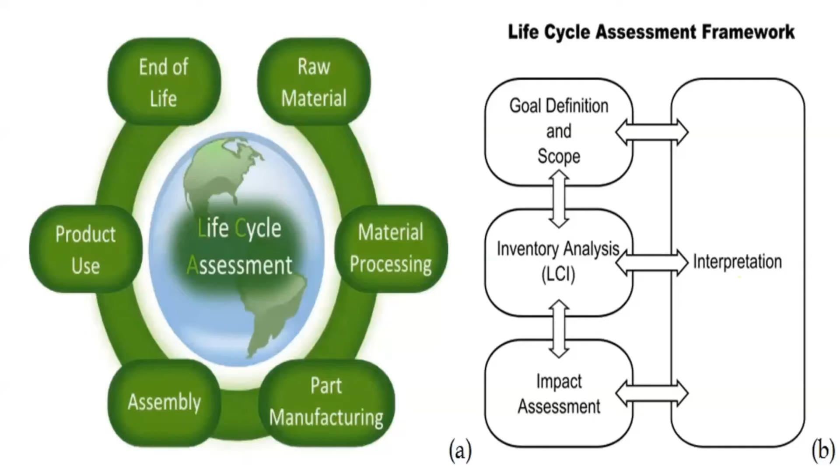So product stages mean the construction phase. You will do quantity takeoff from the databases, and that database is in the BIM. Use phase means over the use of the building, you will have to share some energy models with the certifiers and with LEED and with other institutes. Those are for green buildings. And the use phase model data will be from energy modeling software, like HAP or eQuest.

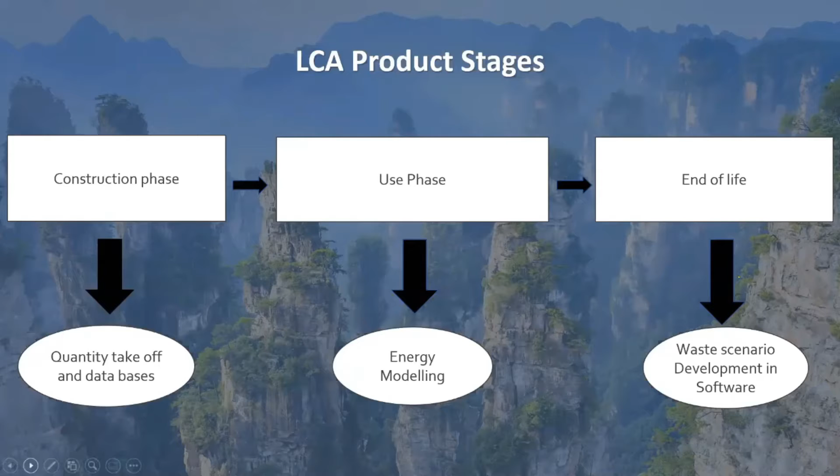And the end of life cycle waste scenario, there are some models in the software being developed for the impact assessment, and you can develop your own waste scenario, because everything is editable and can be edited and explained in separate files. I will explain that later in the practical demo.

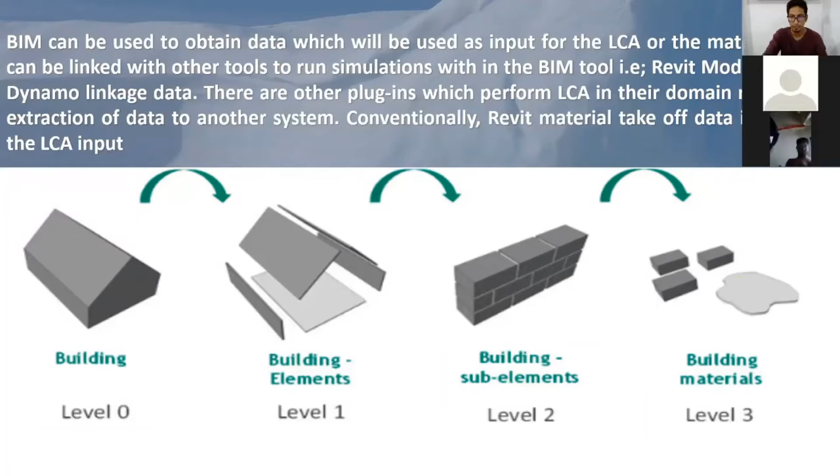So this is the BIM and everything, and the level of details and other stuff. This is the building level 0, the building elements, the building sub elements, and those items. And ultimately it will come down to the building material, and it's quite interesting.

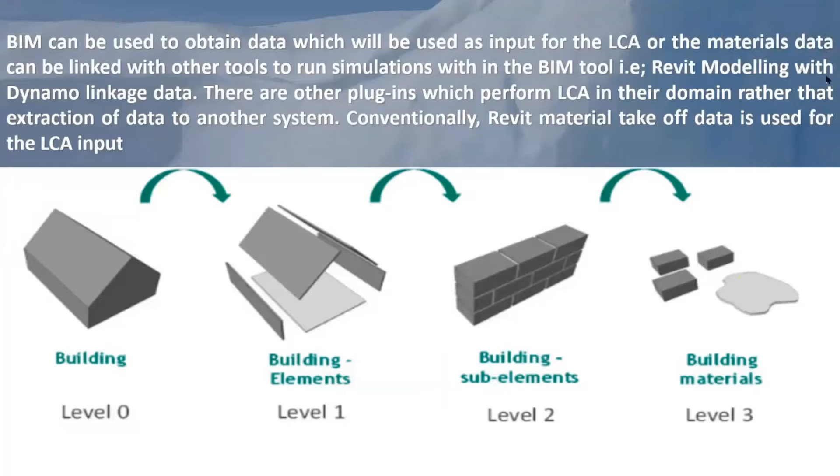Let's start from there. So there are 3 standard and acceptable software available in the market that can be used for life cycle analysis. SimaPro and GaBi are just like Google Sheets and Microsoft Office Word document or Google Docs are pretty much the same for handling, dealing and editing. Similarly, SimaPro and GaBi are the most widely used, and they are the most comprehensive.

SimaPro's clients include everything from General Motors to BMW and Volkswagen, and even in the military they use it for life cycle impacts, and even in the fashion industry, everything, even fashion products like lipstick, they are again material. So the material life cycle is again with SimaPro. Similarly, we all wear dresses, and even in the agricultural and textile industry it is being used.

So construction is no exception. Tally is tailor-made specific to construction, and it is a plugin in the BIM. You don't have to export data into some other software. You just go into another tab, like you go for energy analysis in the BIM.

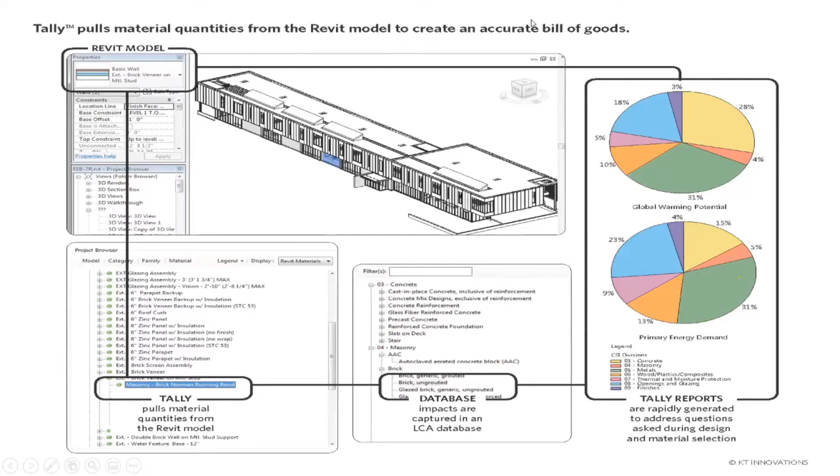Okay, so I will show you some videos of how this all works. Please bear with me and just have a look at this video.

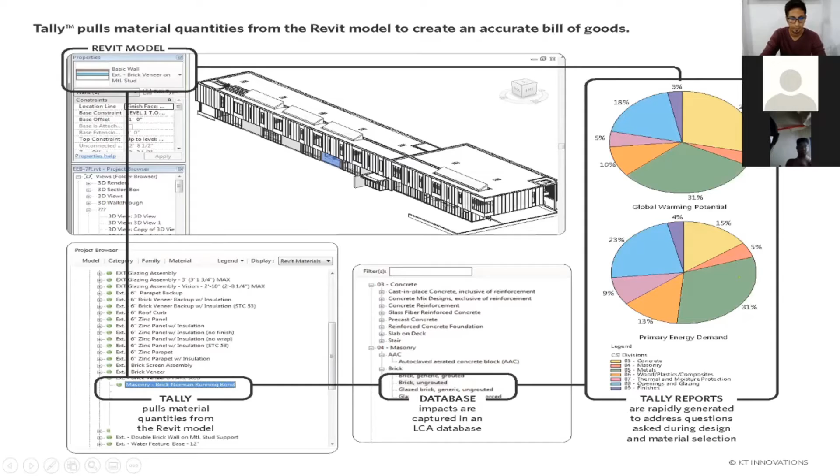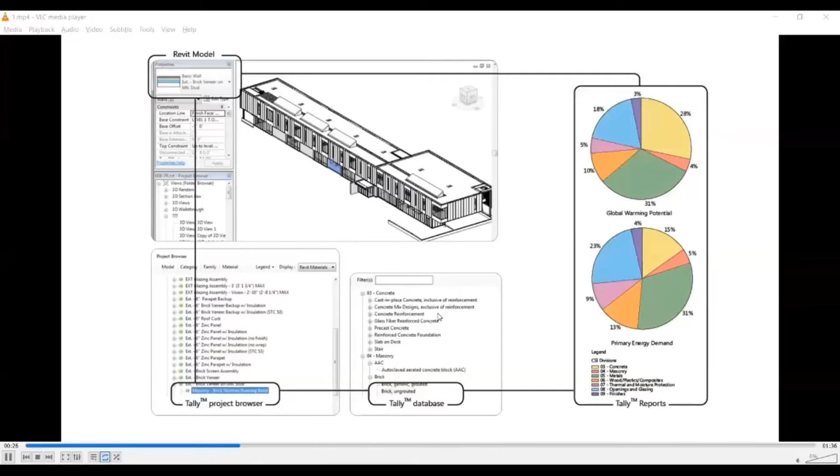Adnan, is everybody seeing the video? I'm not able to see the video actually. Can you watch it on my screen? No, we cannot see the video, Shoaib. Okay, you cannot see the video. Okay, I will share it. There is just a bit, give me the time. So what I'll do now, I'll just stop your sharing screen and you can connect again for sharing your video. Okay. I hope you can now watch the video. Is that true, now you can see the video? Yeah. Okay, so can everybody see it? Yes, we can see your video, your screen. We can't hear anything though.

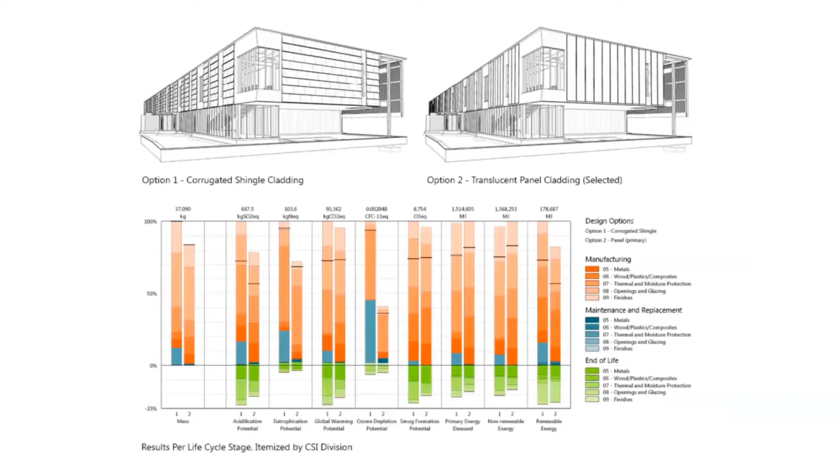To all the participants, there is no issue if you are unable to listen to the voice. These videos are available freely on the internet, you can watch them later to understand how it works, and I will give you a little bit of commentary of mine if there is anything to explain. So there are just 2-3 videos, just 4 to 5 minutes each, and we can go through them.

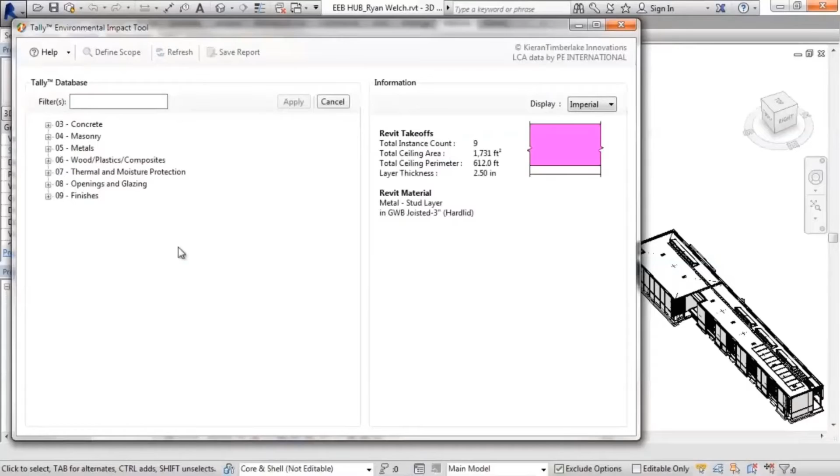So this is just showing how you can edit and go through and apply the materials and take off by spacing or by the length method, and I hope you know the different quantity takeoff methods. You can use the unit and definition and apply, and all the material properties will be in. You can just select the life cycle stage in the CSI division.

We use the categorization scheme there, and there are different methods of life cycle impact analysis. The ReCiPe midpoint method is the actual method that we widely use because it's the most comprehensive. Otherwise, if there is some special demand, you can click, and the software will know that you are going to run with that categorization scheme. So that's all about just pick and click and then done.

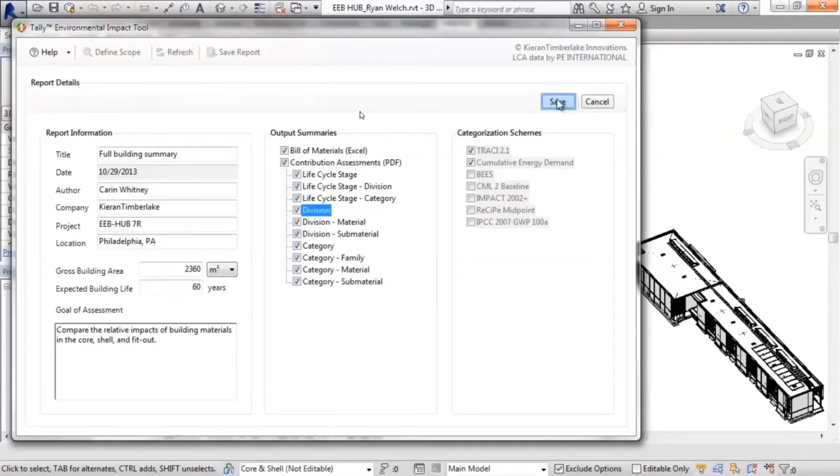This is the kind of result, the life cycle stage is there, material-wise there are legends, there are results, and the Revit categories. So now the second video.

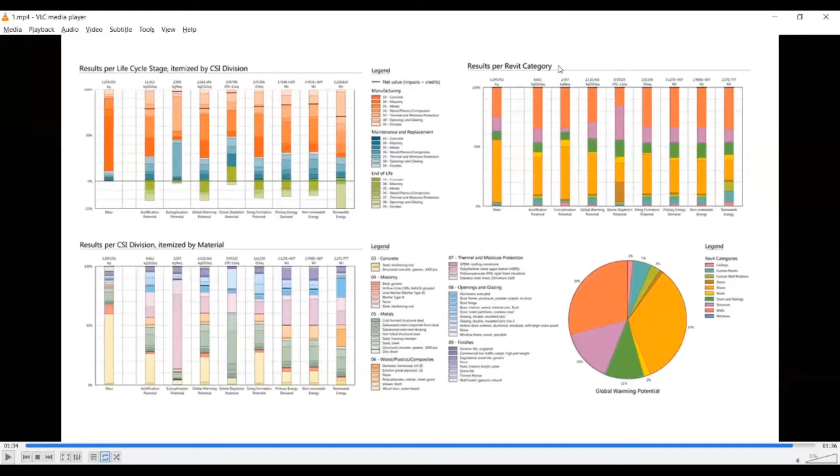I hope you can watch the second video. Yes, now it will start from the beginning. Let me just... okay.

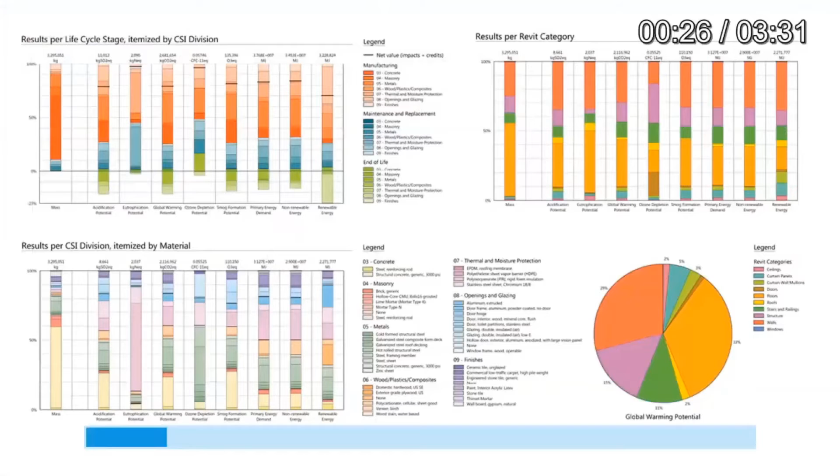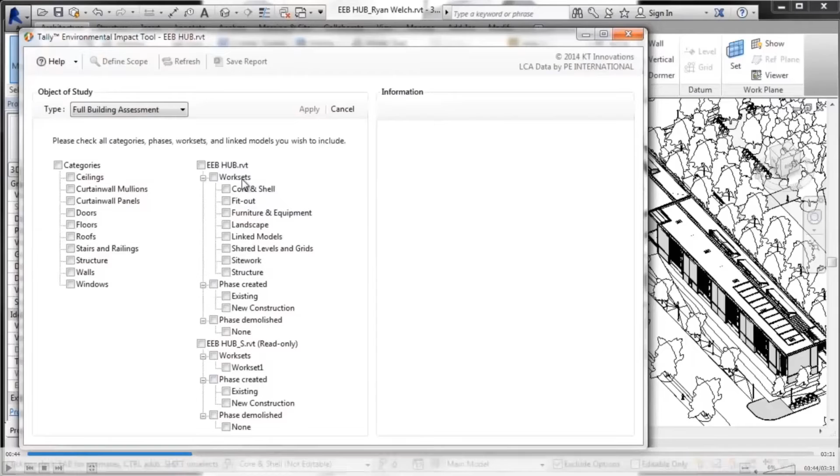The full building assessment has been selected, meaning we want to have a full build assessment, and we are selecting all the categories. Why do these categories have the option to select? Because sometimes during research or while justifying to the certification authority, you need to justify a particular part of the building, that the floor material or the roofing or the curtain walls or the panels are sustainable in their own individual capacity, or they are being responsibly sourced. So you just go to that particular option, select and generate the report and justify your case.

So in full impact assessment, you will select all the categories, and the relevant scheme will change accordingly. So the full scheme has been selected, and then the workflow - one more thing is that you can distinguish between new and existing construction, and you can define that in the BIM, so you know how much we achieved from the previous renovation scheme or structure, because sometimes there are no new structures, just renovation and extensions, and you explain and justify that.

Even in the LEED certification, they ask you to select whether it's a new construction project or a renovation project, because different thresholds apply for LEED and other standards.

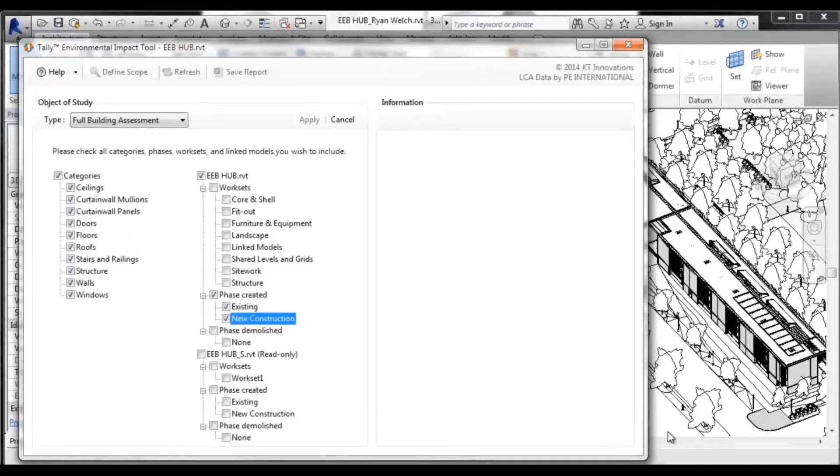That is selecting everything. You can see they are selecting the Revit files, worksets, workflows, everything. Phase demolished - they are considering the waste scenario as well at the bottom of the screen.

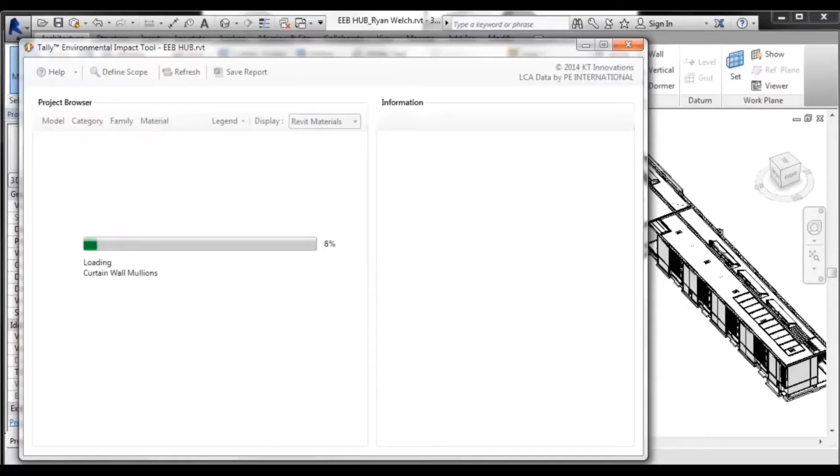Now Revit is loading all the families and all the material data. It depends on your computer speed, but in actual it doesn't take much time. It's a very light plugin, although it's a paid one, but it's a light one.

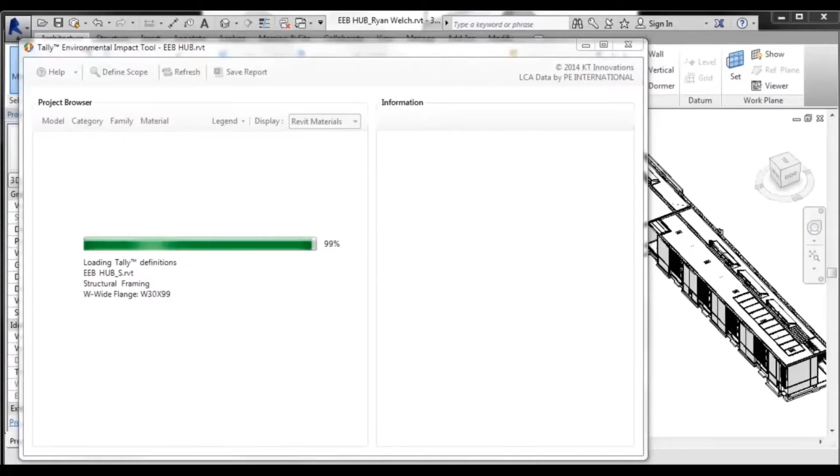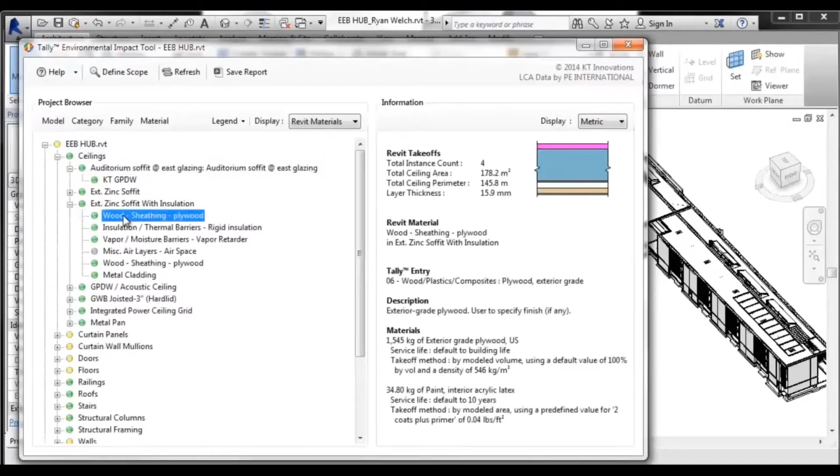So now there are different colors. Green means that all data is being pulled. Yellow means that something is not right and something is missing - that will tell you to pick and choose and edit everything. Gray has a different definition, that okay, I have some missing data. Ultimately, green means that all data is set and good.

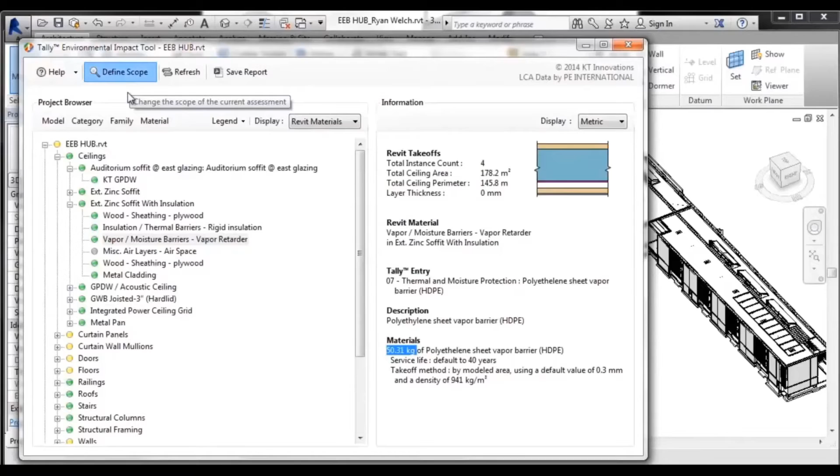You will define your whole analysis, and the whole definition of life cycle will go null and void. So scope is as important as anything, even more than conducting the life cycle analysis itself, because there are different scopes defined in the ISO 14040. You can read that - it's just a little 10 to 20 page document.

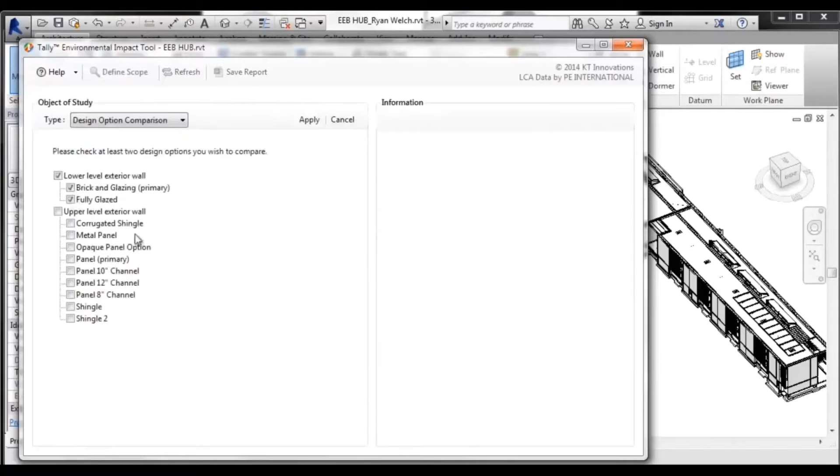Design option comparison, you can do that, because being a designer, you have to decide what is right and what is wrong. All the material is selected, all the categories, Revit file is selected. Now you want to apply that.

So everything is being loaded up again, loading. Okay, so now here is the legend.

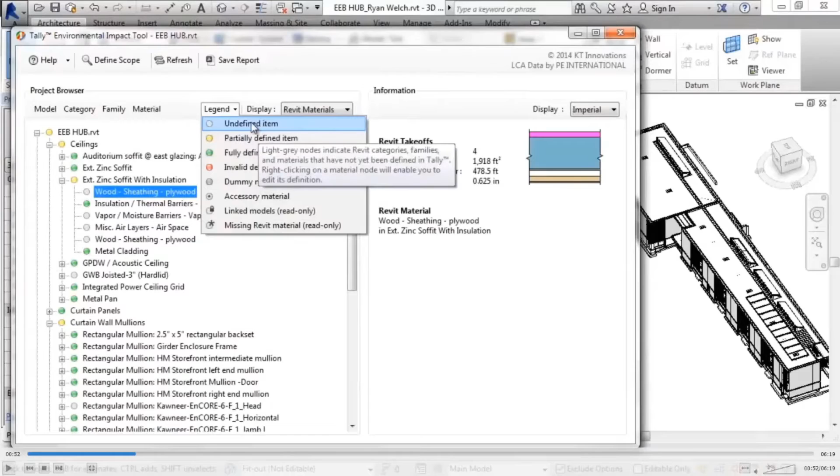That explains that gray means the undefined item, partially defined, and fully defined mean the data is completely being exported to tally as well. So invalid definition means that the system or the plugin doesn't know which element it is or which material it is. So you will go define and edit, and there is everything - you can change the U value, the R value, and material properties, quantities, data.

Sometimes you have regional boundaries as well, because the distances and geographical locations can highly sway the results of analysis.

Tally only has data from the USA. But I have seen a project in UAE that conducted a tally analysis and was accepted by LEED, because they provided all the justification of how they benchmarked the values, and that was all done in defining the scope. So your scope is your validity - the analysis is just the calculation.

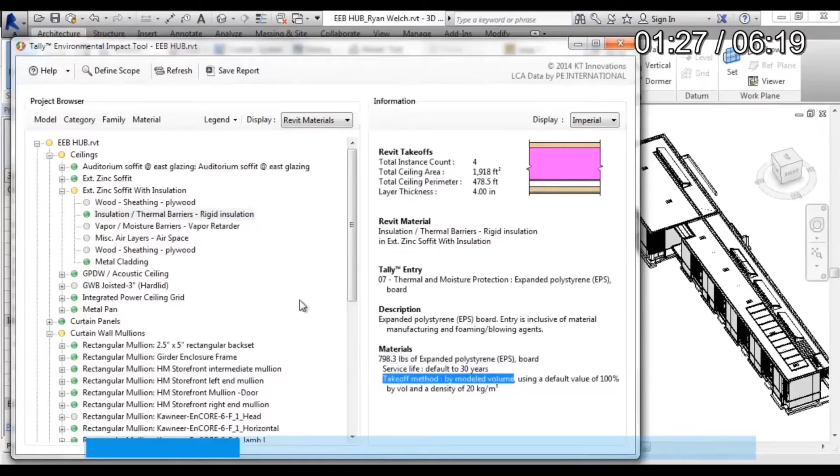I will just - you can change the thickness over here, because you are going to change the thickness and see the results. So edit definition, you can edit.

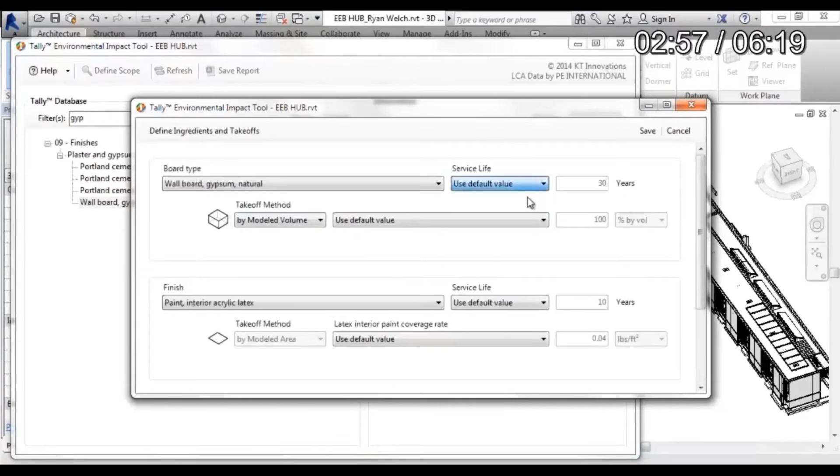There is a database of everything. Basic material, you can define a whole new material. Takeoff method, again you will select it, and everything will be done by the plugin. So it's just kind of a magic box - you go, you put, and you get the results.

Everything in the background, especially the calculation - the life cycle calculations are way too complex, way too complex. If you open and go to the SimaPro, you have to put everything manually. You will know in a minute that there is no joke about life cycle analysis.

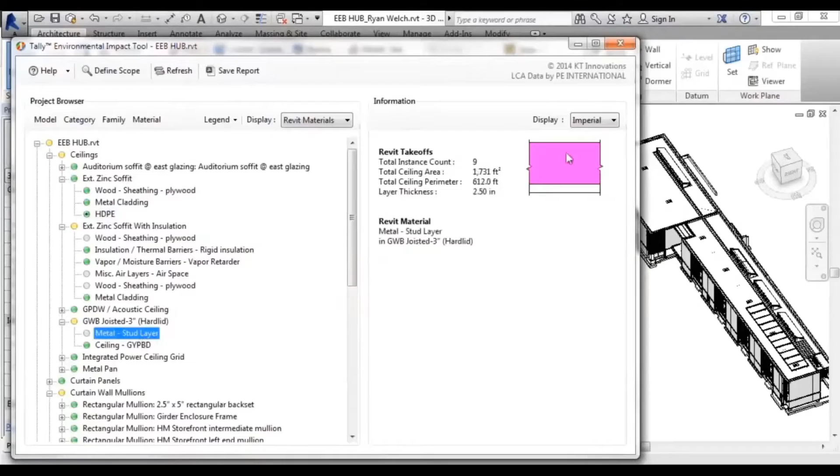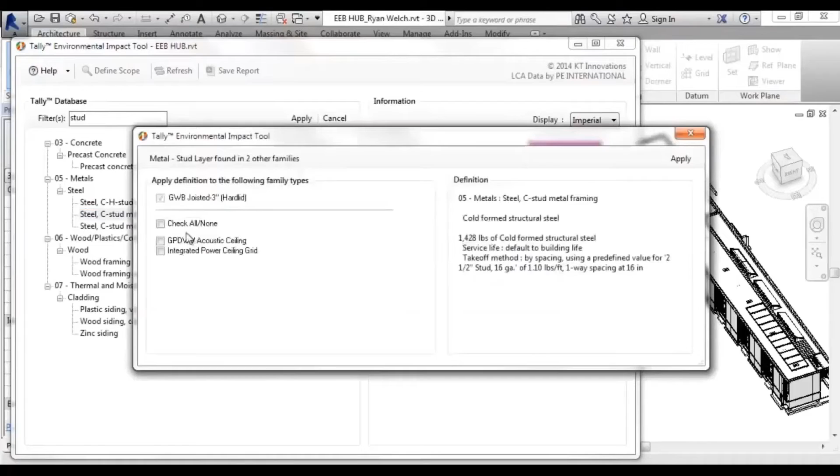To all the students who are going into this BIM business, if you really want to make a career in sustainability and everything, this can be your starting point. It covers everything in terms of BIM handling, in terms of defining, designing - it covers everything. It's a good start, you can earn from it, providing consultancy and everything.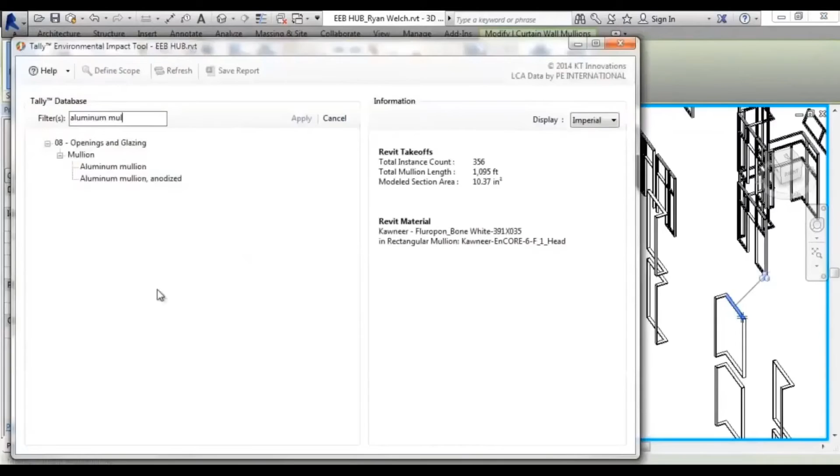So it's quite good, but you have to be familiar with the analysis, because no one will be asking questions about the analysis - everyone will be looking at the scope while going through your report and evaluation. So you must know the definition and everything.

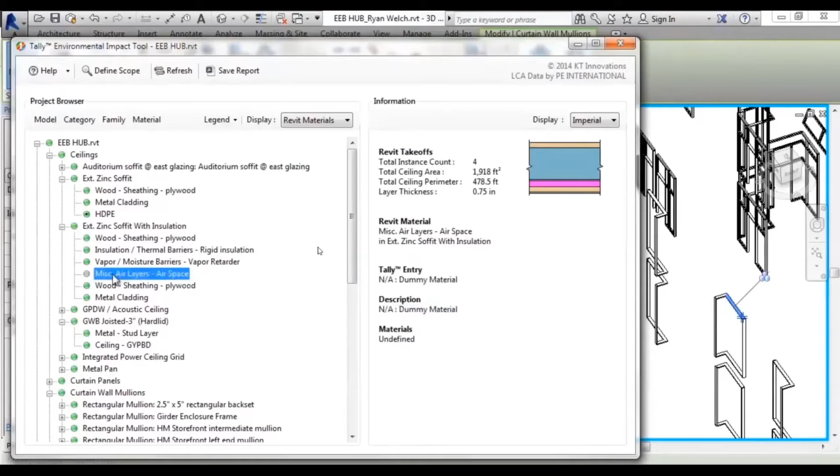Okay, I will start. I will stop here. Okay, I will start. There is a zone going on. So, okay, no worries, I will start.

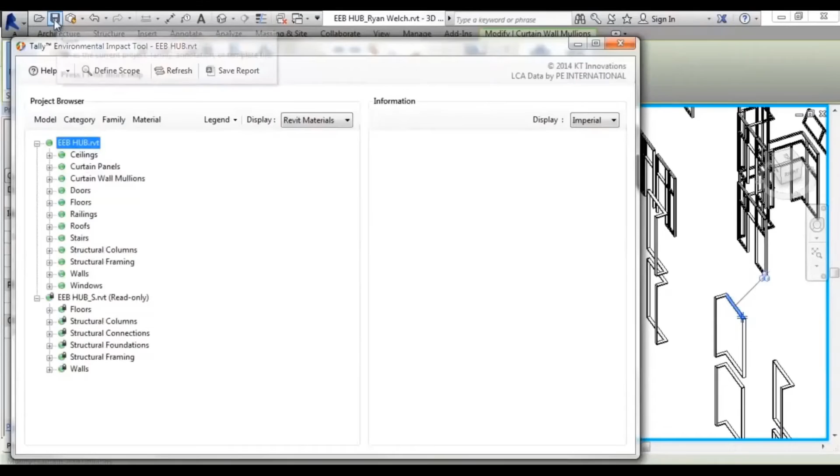Dummy materials are the materials that the plugin doesn't know, so it asks you to define them. The EEB HUB.rvt means the file system, that everything is taken from RVT files, even if you have RVT files of some different project and different model, you can just start from that.

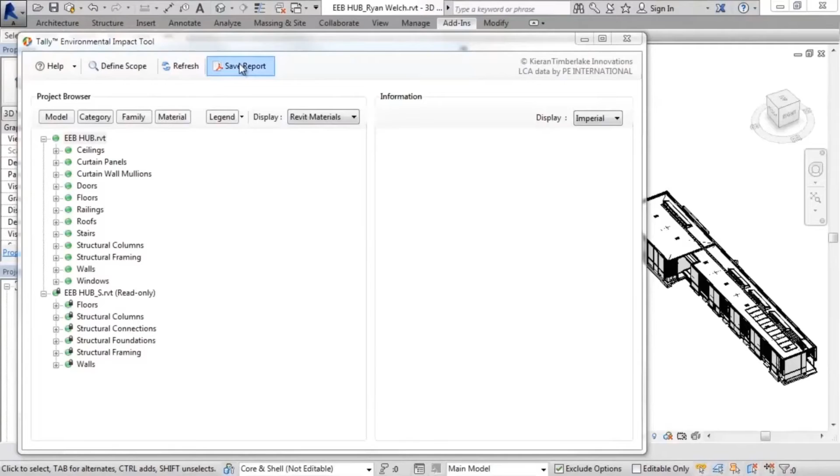Everything is defined, materials are defined, and you can see that everything is green now. Go to the plus sign and check if the relevant files are also green. When there's full green, you go ahead and click on save report, and that will ask you for the name, date, author, company, project, and building gross area, so the person evaluating your project gets to know the salient details.

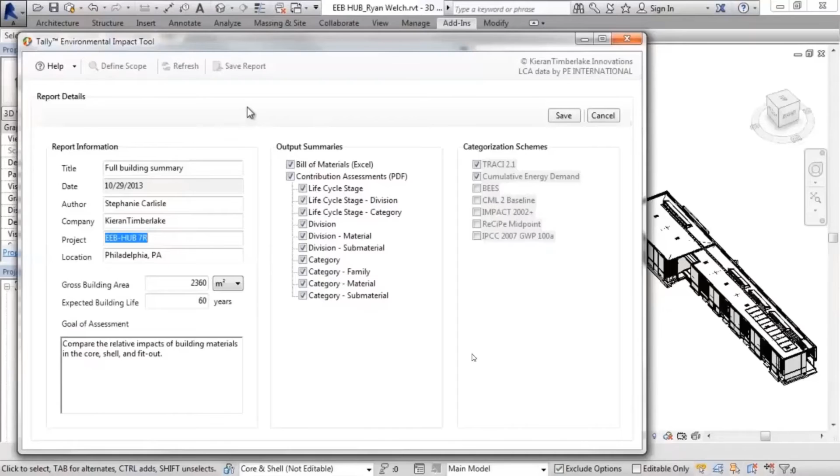Then you go to the goal of the assessment. What is the goal? Because sometimes there are concerns related to water, sometimes concerns related to land use. So you have to say what the goals are, so people know we need to look for this particular impact category, and that demands the improvement. You'll see that everything is imported, and you can just save.

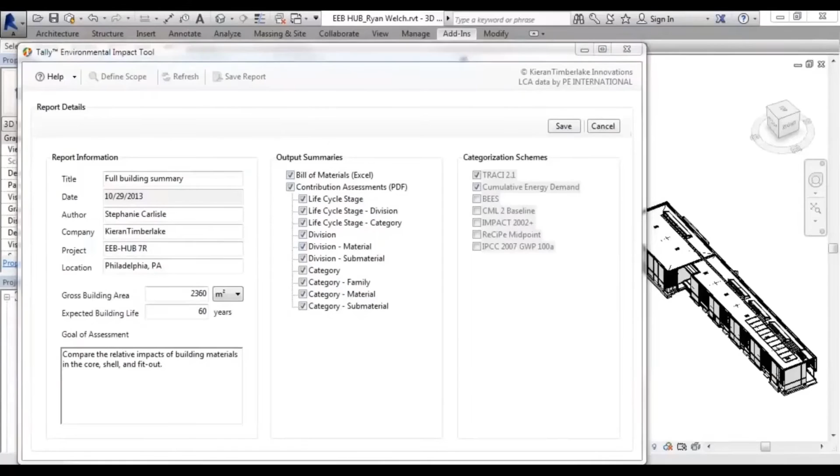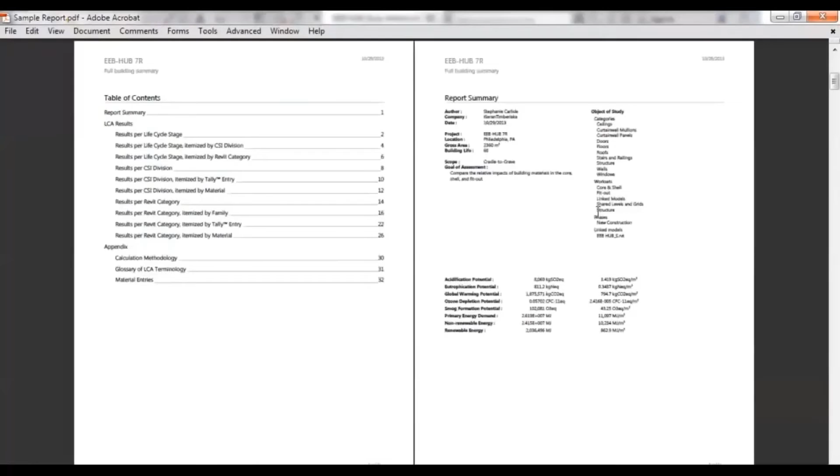The moment you hit this save button, your report will be generated in PDF format. It will take a bit to generate, but it will be a very visually pleasing and authentic report. You can have that in Adobe, and that will define the summary. It will be a proper report like any professional can develop, but here it's just a click away. You are not actually writing or doing anything.

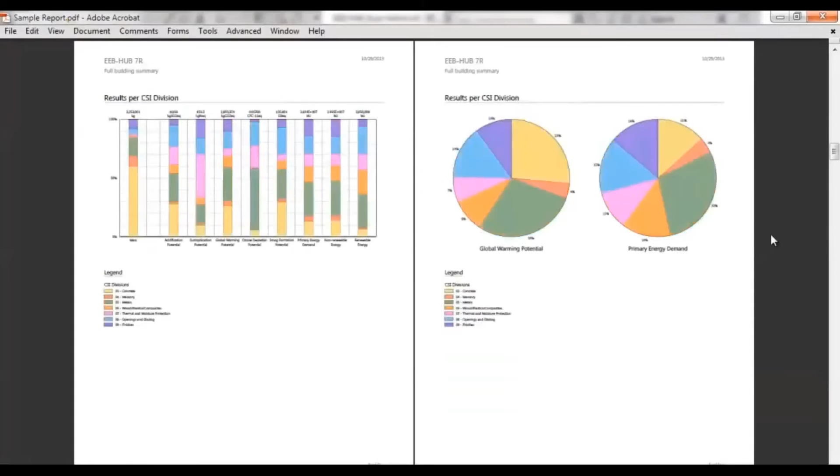You can see there are different parameters in terms of environmental impact assessment, like how much this is contributing to global warming, smog formation, and the bandwidth of this color scheme will define how much your concrete and this material is contributing more weight in that. Ultimately you go and see that material.

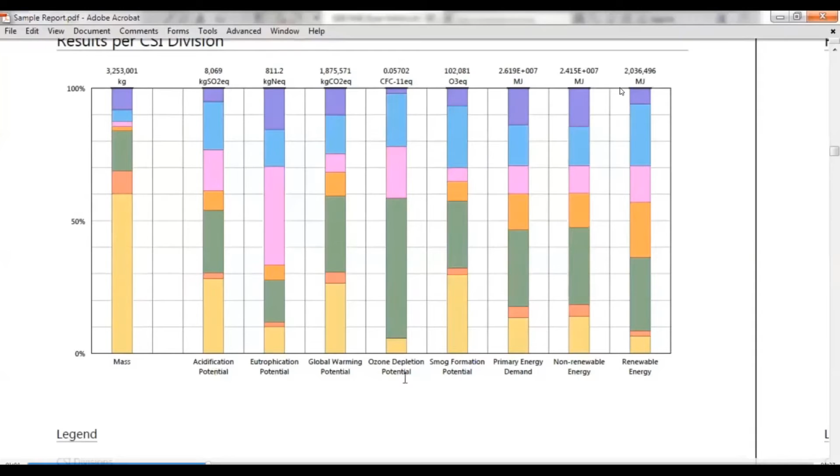So you have a very targeted approach here, you don't go through the whole process and check everything manually. The software tells you itself that you have this much issue in this area, and you can go over there and change the material or look at that, and that is causing the problem.

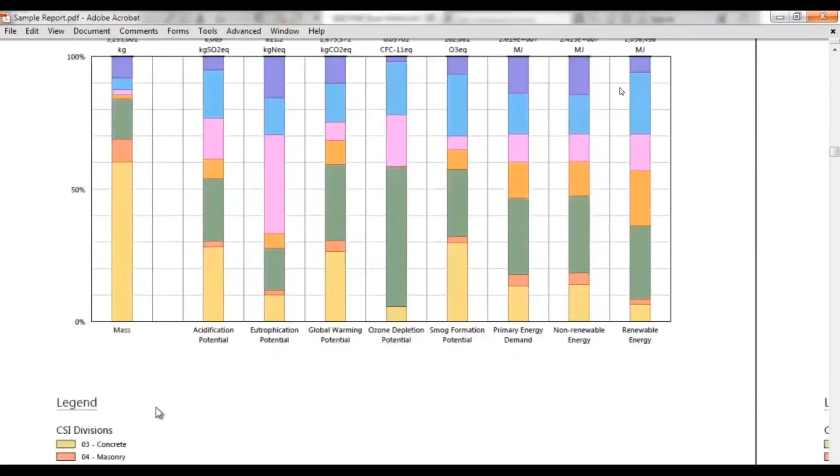Here the red color is for the masonry, green for the metals, woods, and thermal.

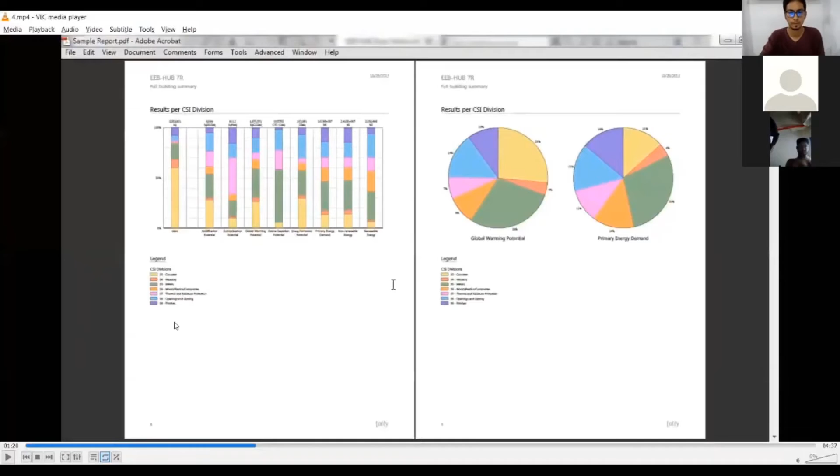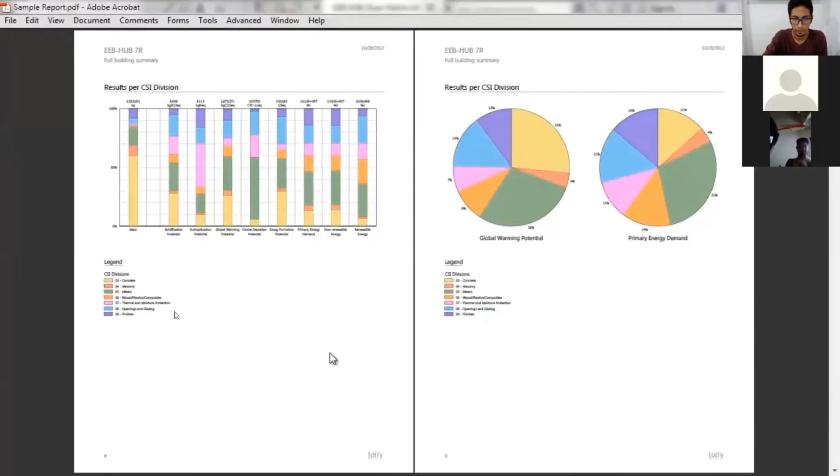I will share the links of the videos, you can watch them on your own, because here you won't be able to read something due to the text and fonts. He is just explaining.

Shoaib, can we also work in a cloud environment with this project?

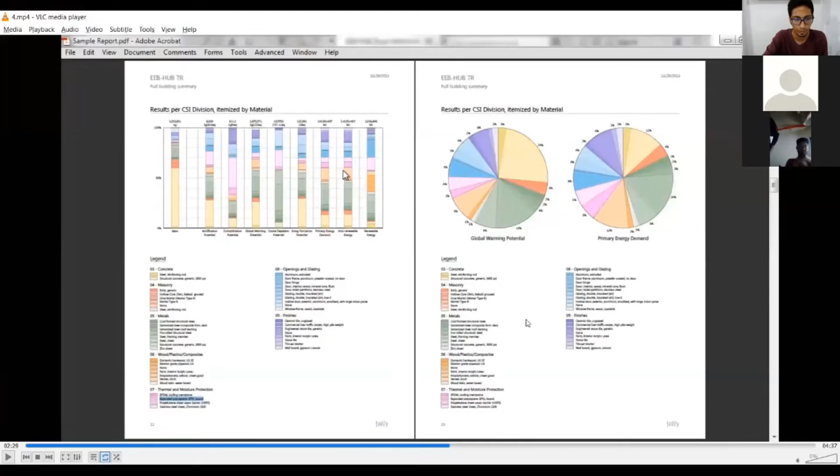Yes, you can work on a cloud as well, but you have to ask the institute or the developers of this application, because if they allow you, you can have your own. They have their own cloud service as well, as far as I know, or they will provide you the complete license, and you can work from anywhere, and even get data from other people. People can share their file, you can run that file in your own system, everything is good to go with that.

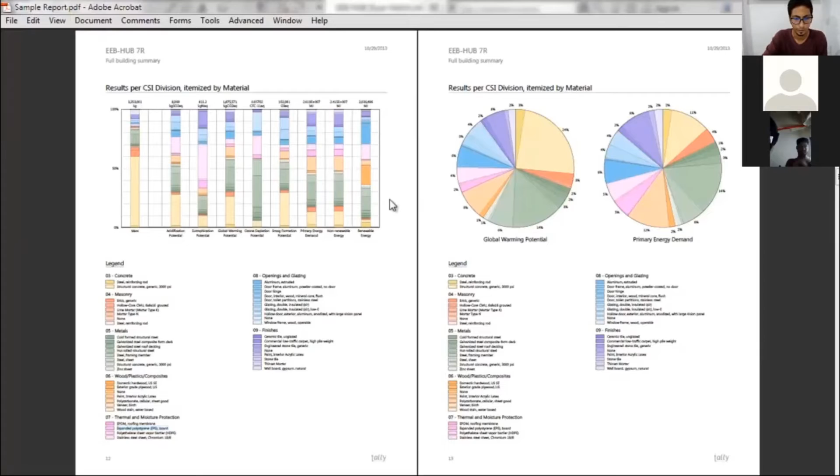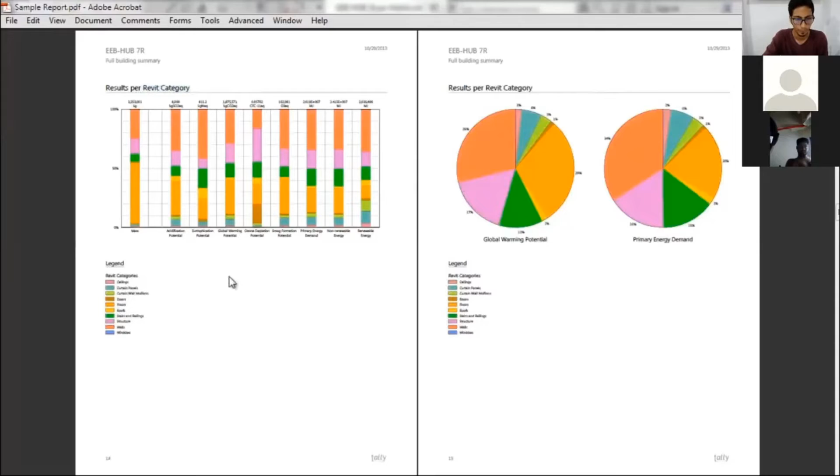We have an educational version, this is not a very popular application for now because it's limited to the US. Educational version is also available, but it's of some limited value, meaning the database will be shortened. They are earning from it, so there must be some shortcoming in the educational versions.

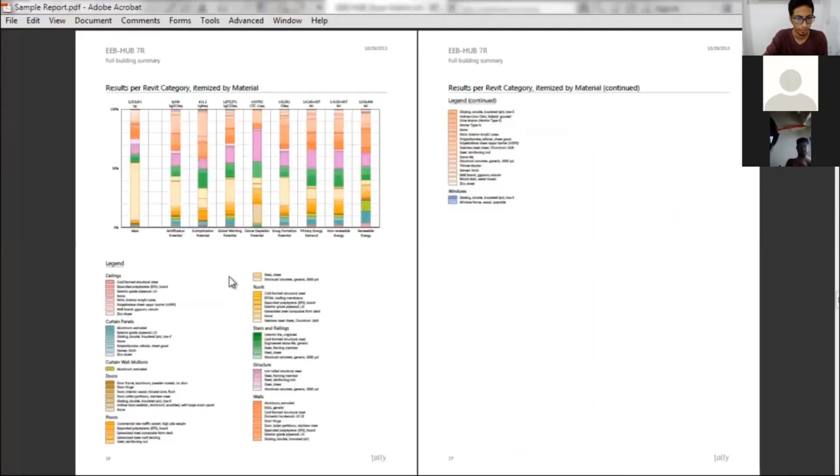Okay, so everything, they have just explained.

Shoaib, I'm asking if you can share any links from where we can download Tally and the other software tools that you have mentioned.

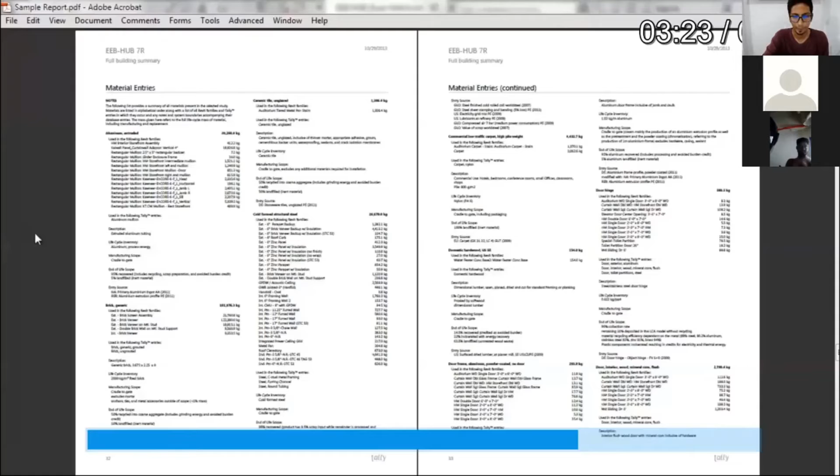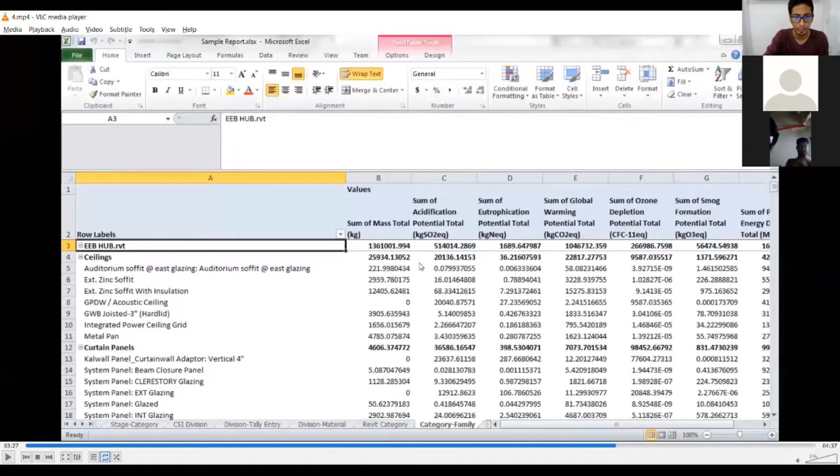Yes, I will share, just let me pass through that, I will share everything with you. No issue, this is just as far as this is concerned.

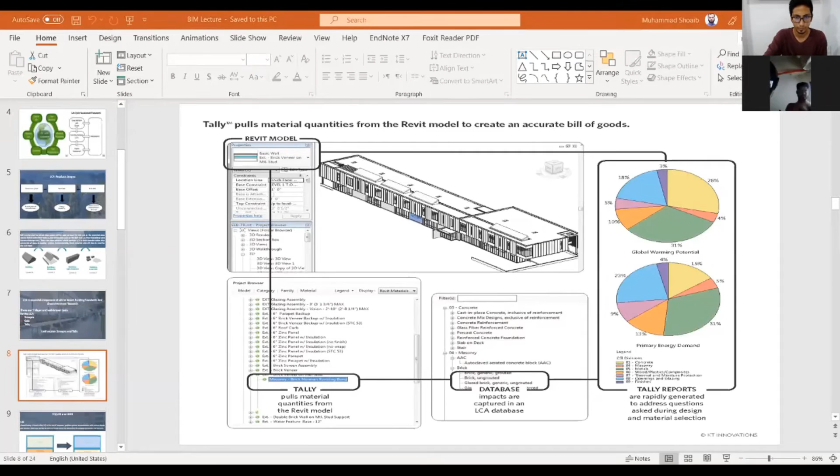I will move back to my presentation, going again to the VR and AR application. My presentation won't sound like I am into BIM, but it is a side application, virtual reality and augmented reality.

Sorry to interrupt, can we take the session with a 5 minute break?

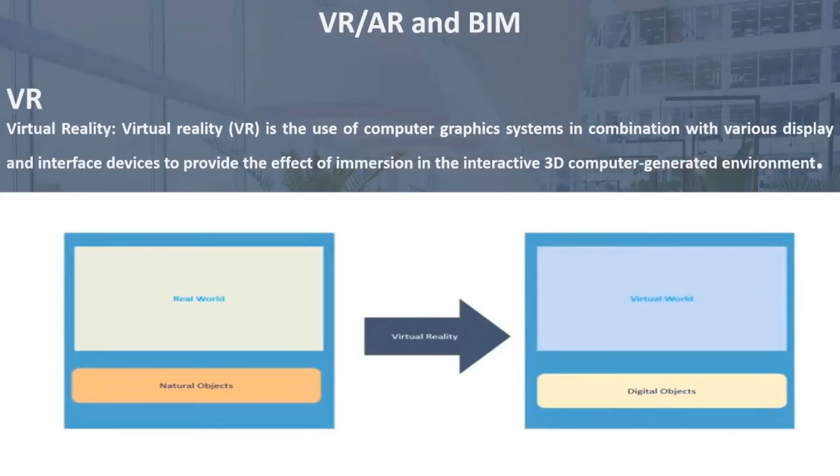If anybody is interested, I am open to that as well. But coming to this presentation, augmented reality creates an environment where computer generated information is superimposed onto the user's view of a real world scene, because you can interact in a virtual world and know how it works. I have a short video that will explain all the dimensions of everything. Rather than me explaining, let me show you what they have elaborated in a much better way, because they have better platforms and everything.

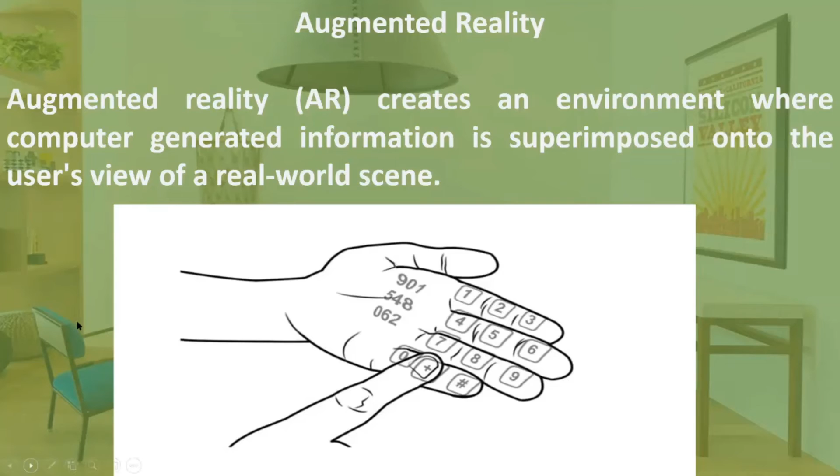Okay, moving to the next slide. AR, VR, and MR represent both a disruption and an opportunity for people used to thinking just beyond 2D information. I will just explain rather than reading the slides.

Augmented and virtual reality applications are like you can train your safety staff, you can train your crane person, your crew person. I'll give you a very interesting example. There was a building in New York, and there was a crane, and they were trying to mount the window cleaning assembly there. It was the highest building in New York, and it was a very big issue. The crane operator got training for 4 weeks in a simulated environment on how to handle the winds and everything, and they saved time and money, especially people's lives.

Applications of VR in general: entertainment, healthcare, aerospace, automotive, manufacturing, everything.

Mostly VR applications are used in prefabrication, because you are using modeling, and someone is sitting in Belgium while the order is placed in China, so they will virtually visit the model and know the imperfections and can order change orders. Even a project manager having holidays at a resort in Goa, during an extension of the London underground metro, before disruption happened, put everything in virtual reality.

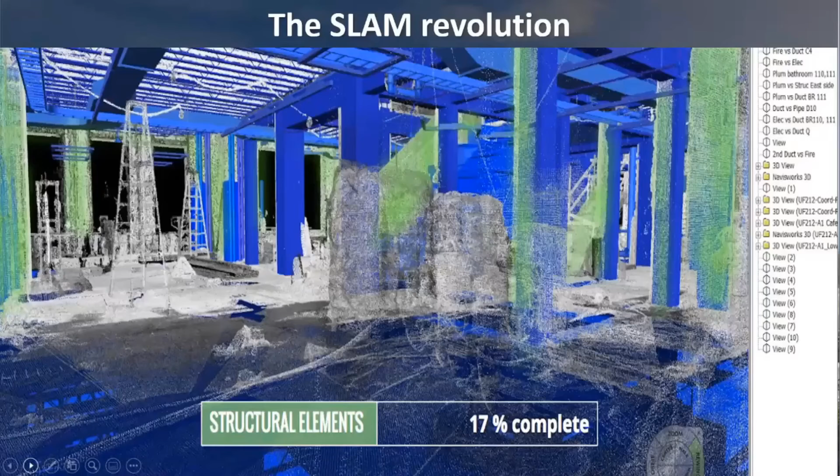Shoaib, can you just start your screen sharing again? Okay, I will start sharing my screen again. Can you see it now? Yeah, we can see your screen now. So everybody is looking at my screen. Yes, it's fine.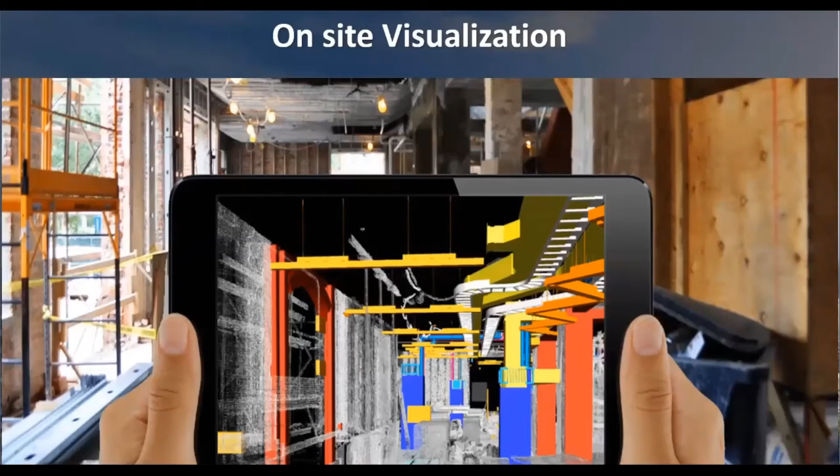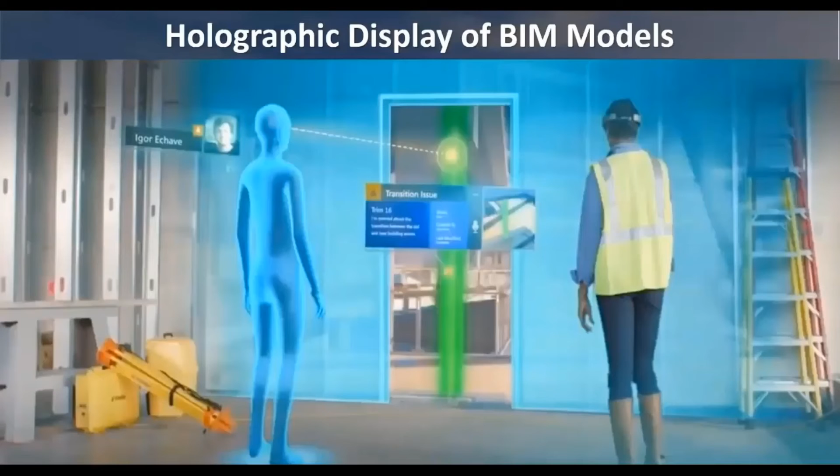A political personality in Pakistan used this holographic technique in his own rally or address to the people. I am not sure, but there was a day in India where Prime Minister Modi was going to address the people in public, and they might also have used this holographic technique - I read something about it in the news. Yeah, you're absolutely right, it's a new thing for the architects and every stakeholder - the hologram.

Okay, so they actually used it. Yes, exactly. Yes, of course.

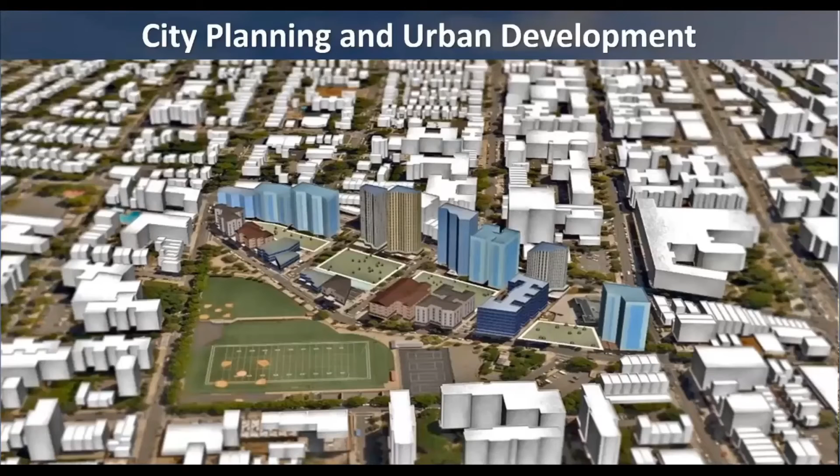Moving on, even in the city planning phase, this slide is from the model of some Singaporean state, because they were trying to address their housing issues. Before that, they developed everything in the gaming style in AR and VR, and ran air analysis because they were thinking about how to build in the city.

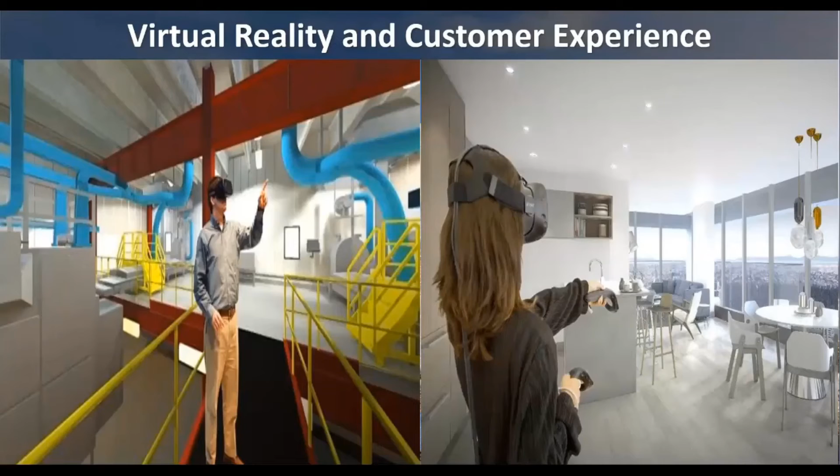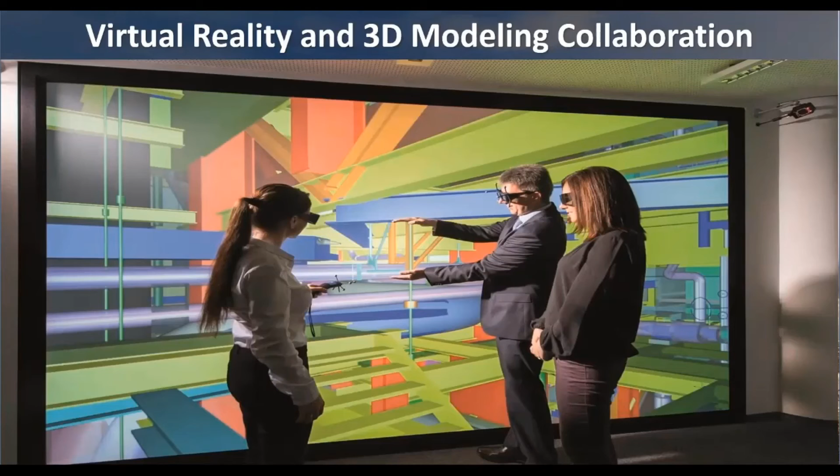When you go to corporate offices, they are very particular about their finishes and checking the colors, so this can also be used for big corporate clients. This is just the discussion of collaboration. People are sitting in their office but they are actually on the field. So you can sit in India and see the construction site in the United States, China, or Pakistan, and everywhere. This is just the framework of that.

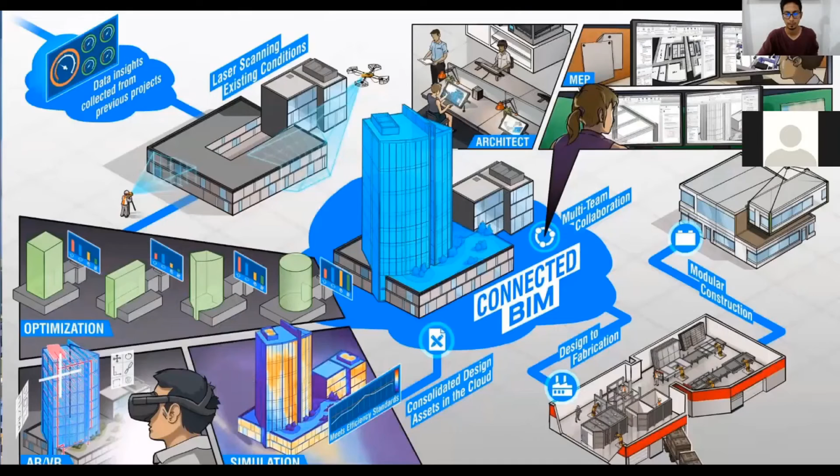Data is being generated, so you can run data analytics over there. If some computer science or data analysis student is listening, they can understand that everybody is getting data, consuming it, using lights, using computers. So everything of our behavior is data science.

You can see a drone over there. The drone saves all the building details via laser scanning, and after 10, 15, 20, or 50 years, even if there is some mishap and the building is demolished, all the data is not gone. The laser scan model integrated with BIM will have all the data, and you don't have to pay again to the architects for the effort. The data is there, you just do a little bit of editing and rebuild again.

So connected BIM, cloud, and there is a whole new thing for data. I won't go into detail because data analytics and building construction has a whole new scenario of research. It's quite an interesting area if some programmer or data analyst is listening.

So I will end my presentation and show you some video. I would like you to pay attention to every detail of that video. Just let me play that. Okay.

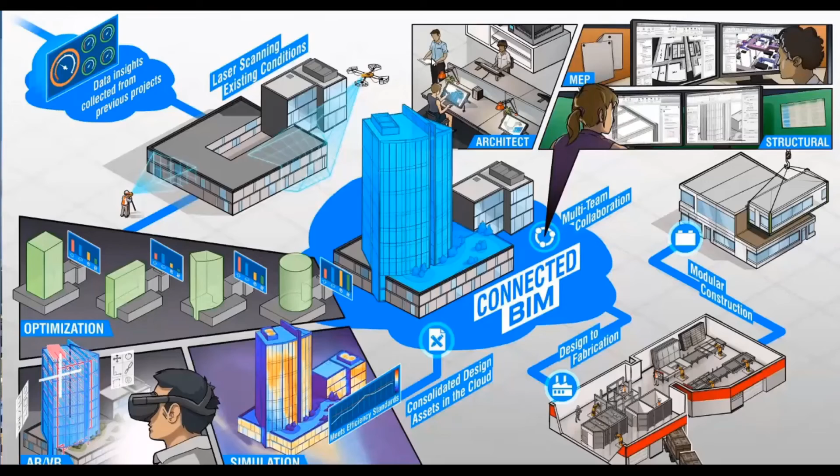Everybody can see the video now. If you can't hear it, just see what is being shown, you will know. Hello? Is the video playing? Because we cannot see it. Okay, the video is actually playing.

I will share the screen again. The video is playing, let me... Okay, here you have the video. Can you watch it now? I will move the video. Right, okay, it's just a 2 minute video, very informative.

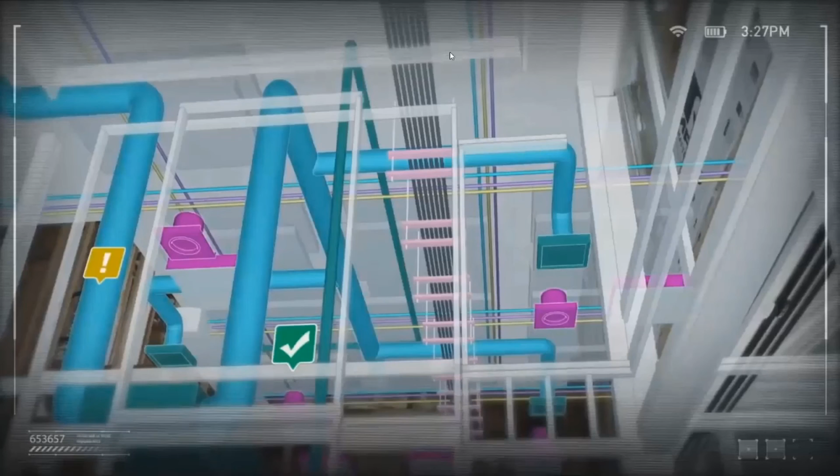Everything is quite self-explanatory, so I won't disturb you. I'll just let you pay attention to the video.

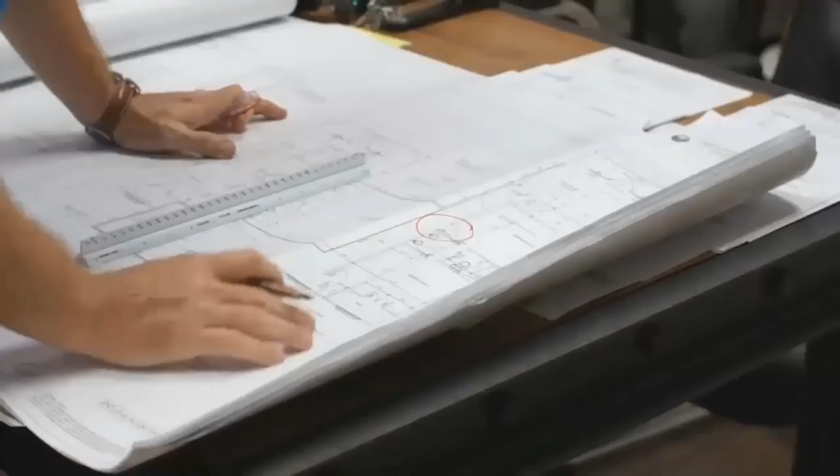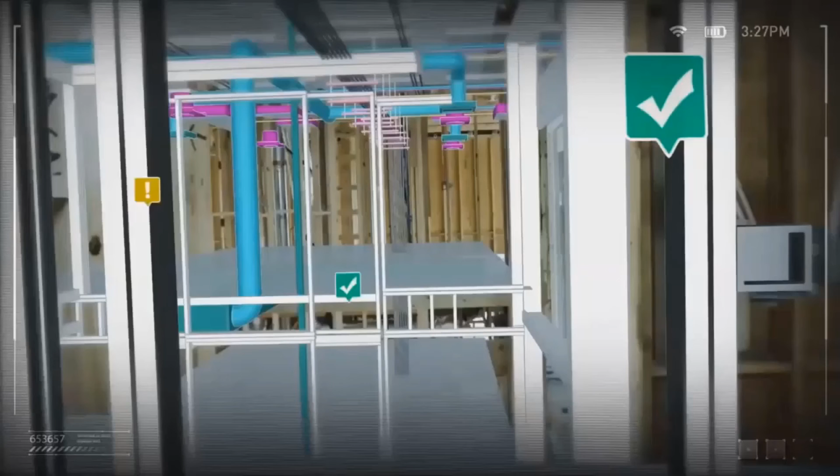This whole digital thing will remove the long bureaucratic issues and the delays and everything. Even the transparency will be unmatched. So technology is the solution, but quite expensive technologies.

So this is the end of my lecture and everything.

Yeah, there we can. If there is any question, you can ask me. I will share everything with you, Adnan, in a bit. But if there is some question, let me answer it, and I will send you a comprehensive email defining everything, and you can share it with the audience in the WhatsApp group or everywhere. So just jump to the questions for now.

Hello. Yes, I can hear you. So any questions from the audience? You can raise your hands, I will unmute you. Just unmute yourself and ask questions. Don't bother to write, just ask. Even you can speak Hindi as well, I will answer you, no worries.

Yes Kunal, I think there is no question. That's okay. Yes Kunal, we can hear you, do you have any question? I was having one. Kunal, please speak louder, I can't hear you. You have a very faint voice coming to me as well.